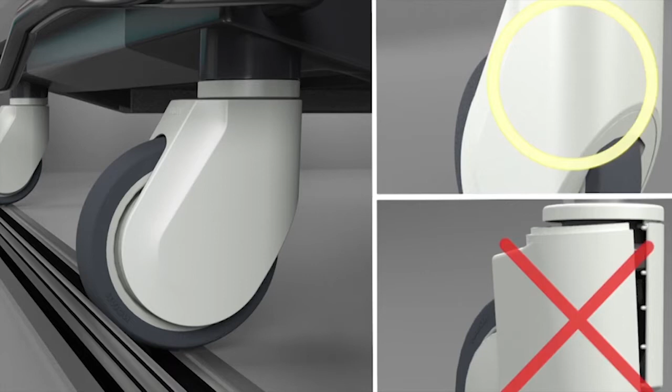Caster wheels are mostly used in hospital beds, office chairs, toy wagons and material handling equipment. These casters are not resistive to shock. Because of that, they get cracked. People face many difficulties due to this problem.

As an example, in hospitals, patients feel very uncomfortable when they are carried on hospital beds. Also, hospital staff face many troubles with these types of casters. In supermarkets, customers couldn't carry their stuff safely and easily because these casters are not absorbing shocks. They have to make more effort to move the shopping carts because of this.

In large factories, they have to spend more money to repair and replace cracked or broken down casters. At present, there are shock absorbing heavy duty spring loaded caster wheels, but there is no existing solution for small casters. So we decided to design a shock absorbing caster wheel.

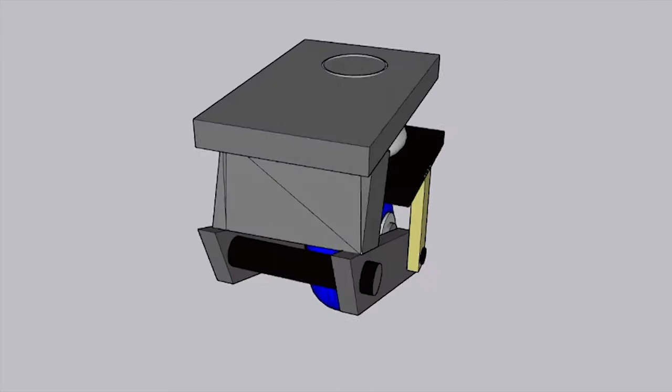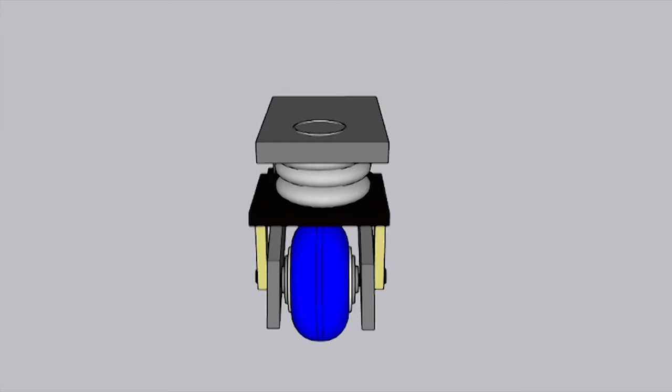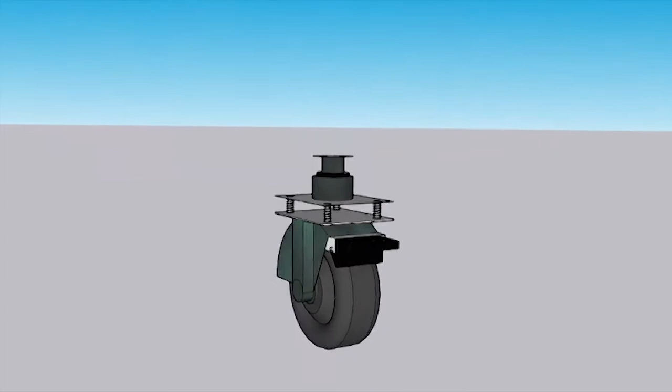Then we will consider our conceptual designs. This conceptual design uses a rubber damper on the caster plate to absorb shocks. This is our second conceptual design. It is designed using 4 springs and 4 pistons as the shock absorbing mechanism. Also, this contains a locking system.

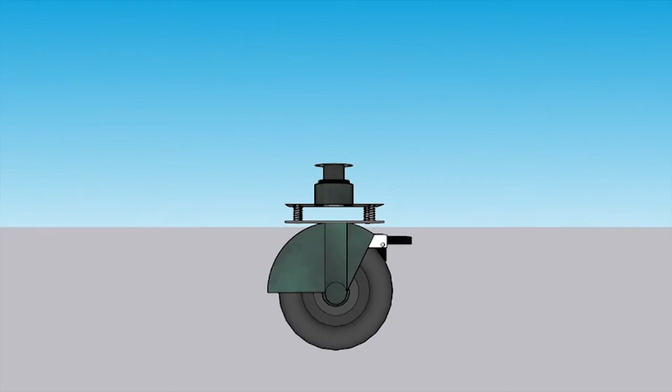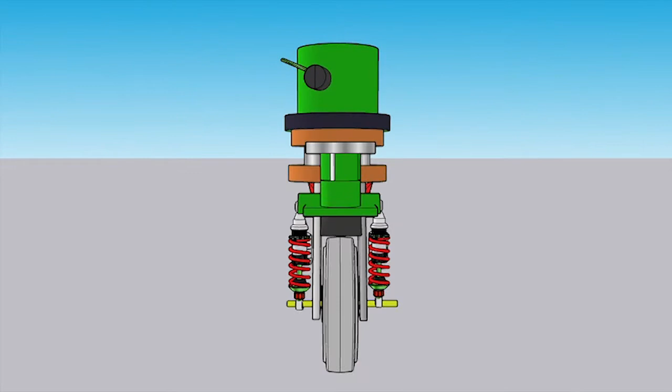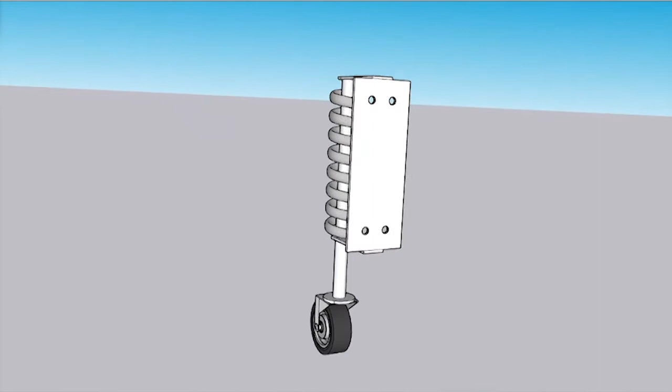This is our third conceptual design. It has a hydraulic damping system as the shock absorbing mechanism. As the locking system in this design, there is a swivel lock. This is our fourth conceptual design. It contains a spring damping system as the shock absorbing mechanism in the caster wheel.

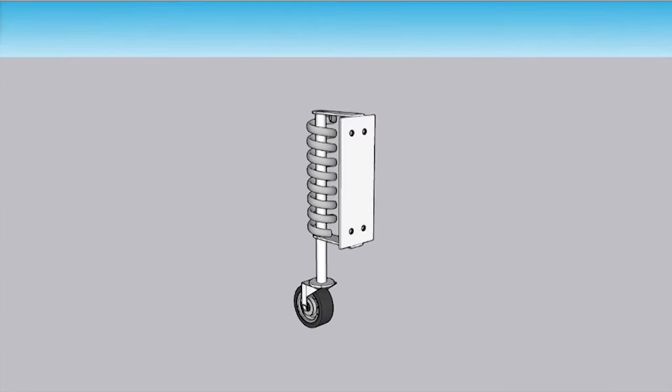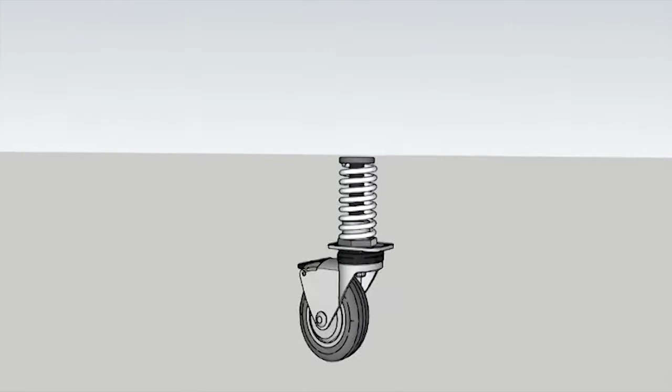This is the last conceptual design of our group. It is designed using a coil spring and a shock absorbing piston. This design also uses the spring damping method to absorb shocks.

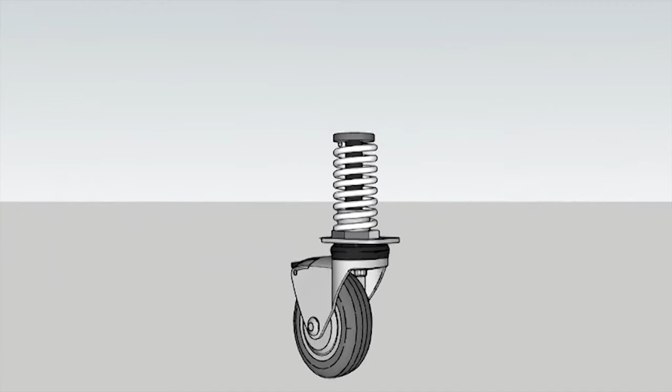By considering all the problems, constraints and limitations, we designed a caster wheel having a shock absorber while fulfilling some of our objectives, such as durability, marketability, attractive appearance, and high strength. So this is the caster wheel we designed.

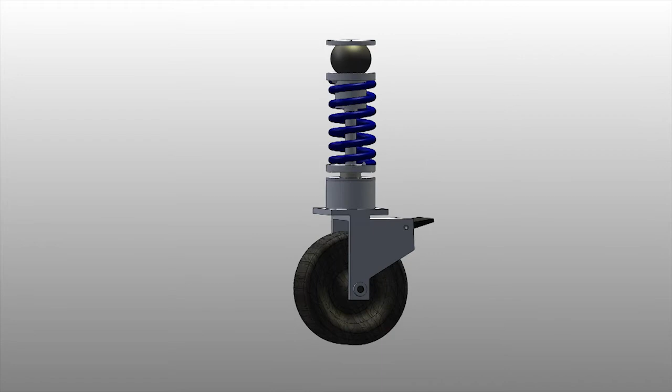From analysing all the alternatives, we chose a spring damping system and a rubber damper to absorb shocks. As the locking system we selected the mechanical locking system. We use the nut and bolt fixing method to fix the caster. Then let's look at the parts of the final product: fixing plate, rubber damper, shock absorber, coil spring, metal rod and plate, connector, lid, ball bearing, metal fork and lock, axle, washer, roller bearing and wheel.

The designed caster wheel has the ability to absorb vertical shocks because of its spring damping system. Also, it can absorb horizontal shocks with the help of the rubber damper. It contains a mechanical locking system which ensures safety. This is how the caster wheel absorbs shocks.

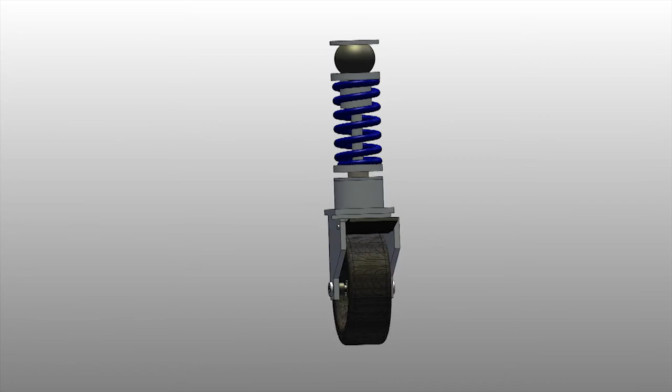By including shock absorbers in the caster wheel, most of the problems can be solved. It will be comfortable for patients when carrying them on hospital beds. It's very useful for customers who use shopping carts because they can carry their things safely. Not only that, factories can save money without wasting it on bad casters. We improved the quality of our product and its user friendliness.

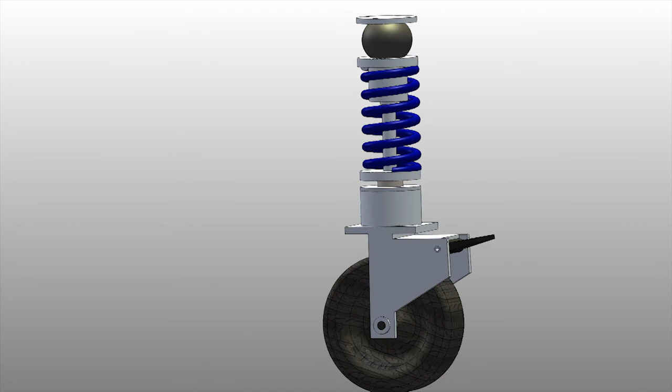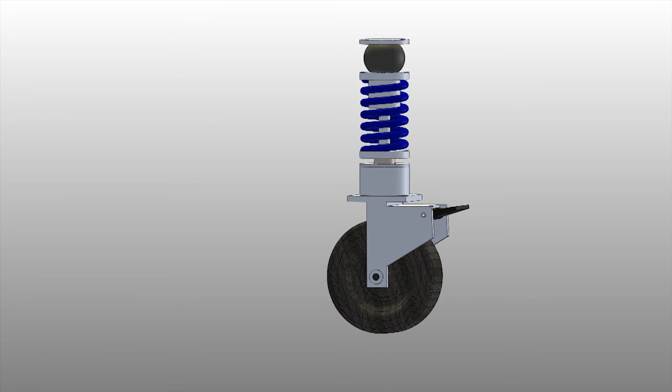When considering the cost of the product, we did many analyses to minimize the cost while maximizing the quality of the product. It helped to market this product at an affordable price. Since we can produce caster wheels at lower cost compared to the caster wheels on the market today, we can manufacture caster wheels at a lower cost for hospital beds and shop trolleys in countries with small economies such as ours.